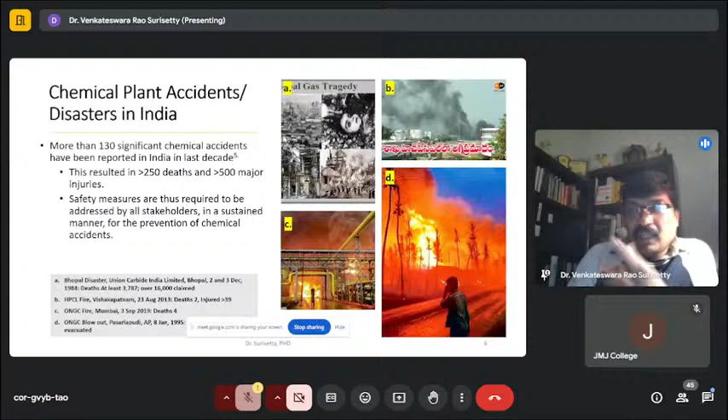So what we believe is these incidents can be easily prevented. But why can't this be prevented? Because of lack of knowledge or lack of concern. So these are major incidents that happened over the last decade, and some happened very recently - August 21st, unfortunately that is my birthday. On that day, I had just come back from India, I left on August 19 and reached here on August 20.

I was with Central Minister Pemasani Chandrasekhar Garu during the flight from Vijayawada to New Delhi. I was sitting beside him, and we were discussing the safety incidents that happened in India. I was talking about the LG Polymers issue and some pharmaceutical incidents.

This happened prior to the Achutapuram incident, close to Anakapalli, Visakhapatnam. I was telling him why these accidents happen and what actions the government should take to prevent them. He said unfortunately the government doesn't have much focus on this, especially the AP government, and asked how to stop it. I said first we have to do an audit of each and every chemical, pharmaceutical, or process industry factory.

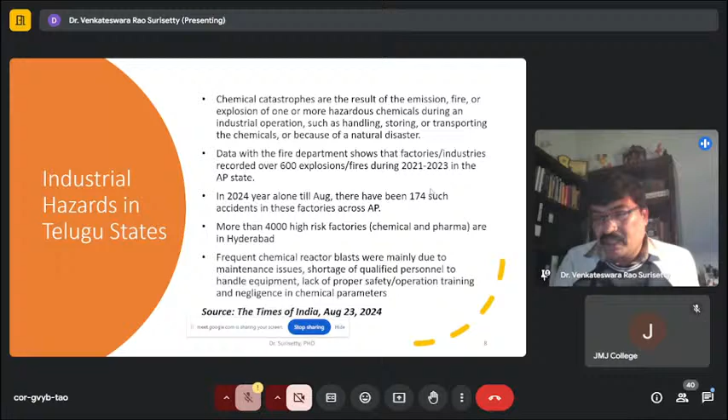Okay, so I took this LG Polymers incident as a case study, and I have done some root cause analysis on why this incident happened and what the chemistry behind it is. So I'm going to talk about this in the next few slides.

So what happened is on May 7, 2020 - you may remember this, COVID peak times, right? COVID happened and the central government in India locked down the country. They locked down the country during that time, and unfortunately this incident happened because the factory, the plant, didn't shut down properly.

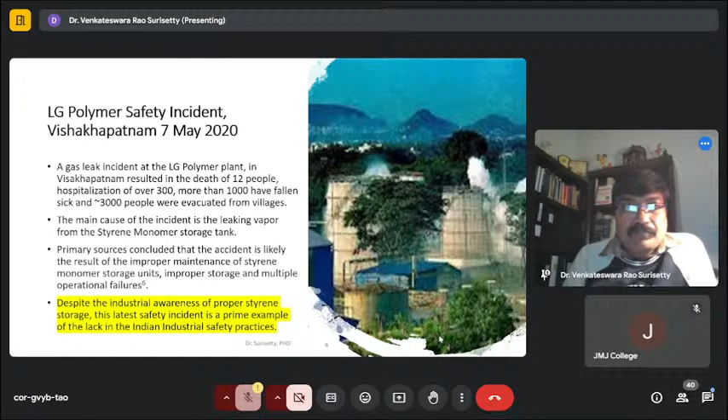Okay, so as a chemical engineer, with my education in Visakhapatnam, and being from India, I got a lot of safety awareness and was involved in safety design, plant building, etc. I thought this was something of great concern to me. I considered this as a case study, and I was reading all the newspapers, seeing the channels and websites, and I was thinking about what the possible system failures were that resulted in

this occurrence. After that I did some case study and tried to make some possible actions, and as I said, I communicated with some people in government, and I also handed this over to the committee which was reporting about this incident in AP. So I tried to do as best as I can from my side, being of Indian origin, with interest in Visakhapatnam, and being a chemical engineer.

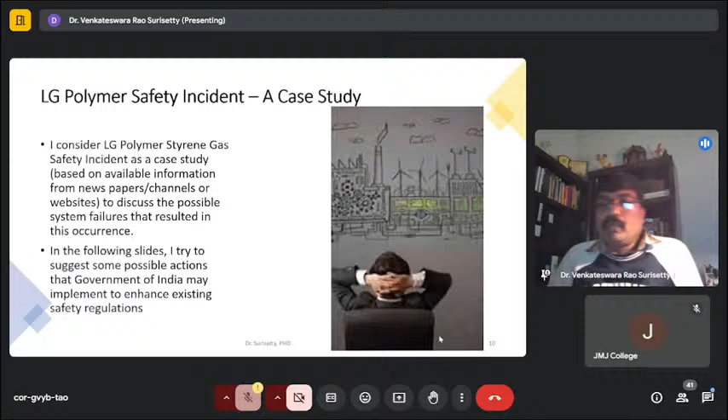Okay, so let's talk about styrene. Styrene is a C8H8 molecule, which is also a petrochemical, a hydrocarbon. It's a benzene group with ethylene on the benzene group. It has a molecular weight of 104 grams per mole. It's a colorless oily liquid with a sweet odor at room temperature, and it has a boiling point of around 145 degrees, which is higher than the boiling point of water, right? We know the boiling point of water is 100 degrees C.

But as I mentioned earlier about MTBE, MTBE is more dangerous than styrene. MTBE has a flash point where it can generate a sufficient amount of vapor to ignite in air even at 0 degrees. But styrene has a flash point of 31 degrees C. And in Visakhapatnam, do you know what the temperature is in the May summer peak season? It is around 45 to 50 degrees C. Let's say greater than 40 degrees C.

That means if you don't circulate a cooling coil around the storage tank, the room temperature itself is sufficient to generate an adequate amount of vapor and cause an explosion. So that's exactly what happened. If you see NFPA standards, NFPA stands for National Fire Protection Association. Using NFPA 30 standards, it can be handled while transferring, and for electrics, I talked about electric classifications in industry, right?

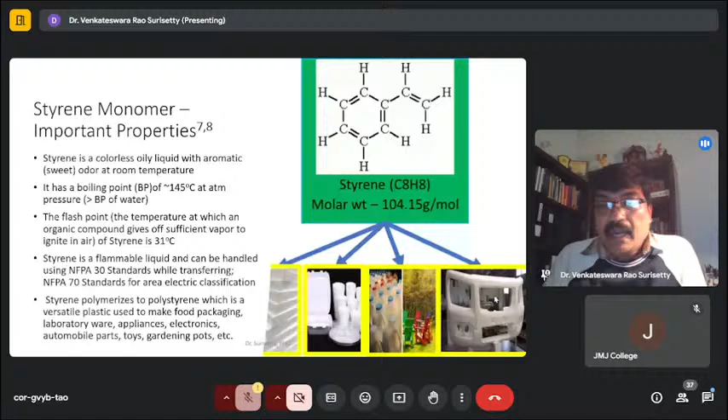So LG Polymers, they are making this chemical polystyrene, and they are marketing and earning a lot of money on this. They are marketing across the world and they are making a lot of money on this, but unfortunately they are not taking adequate precaution while handling this chemical. So you can see the pictures. The pictures from when the incident happened in Visakhapatnam, right side. You can see those pictures in the slides.

Okay. And what are the hazards? How is styrene a hazard to environment, health and safety, right? EHS stands for environment, health and safety. So if you see the fire and explosion hazard, this is classified as class 1C flammable chemical.

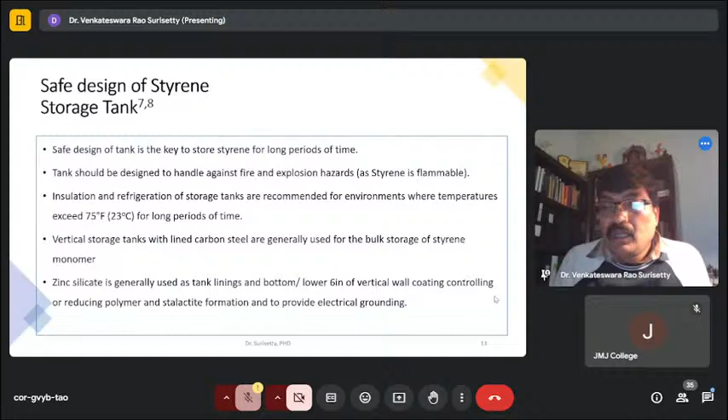Okay. And one other important thing is, whenever there is safety involved, we use high level alarms. This is a flammable chemical, so it is mandatory to use high level alarms for this tank. What these alarms will do: if the temperature goes beyond 23 or 24 degrees, it will alarm. If there is some vapor pressure generated, you can monitor the pressure inside the tank, and it has to give a certain alarm. If your cooling coil circulation has stopped, it has to give a certain alarm. So all these alarms have to be provided on the storage tank.

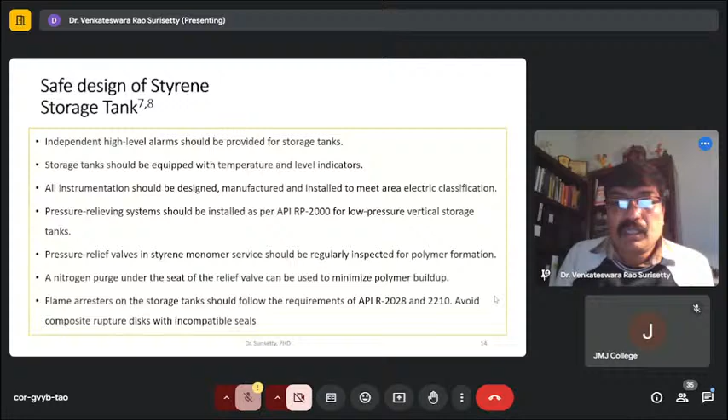Okay, and the storage tank should be equipped with all these things. Flame arresters. You have to use a nitrogen purge, which is very, very important. Nitrogen purge because the styrene will react with oxygen to make an explosion. So you should ensure that your tank does not have any oxygen stored inside. And you have to develop a pressure relief valve, etc. So all these things should be there in the storage tank.

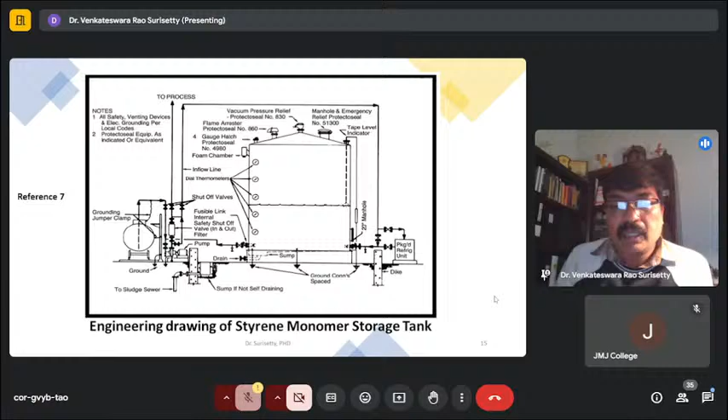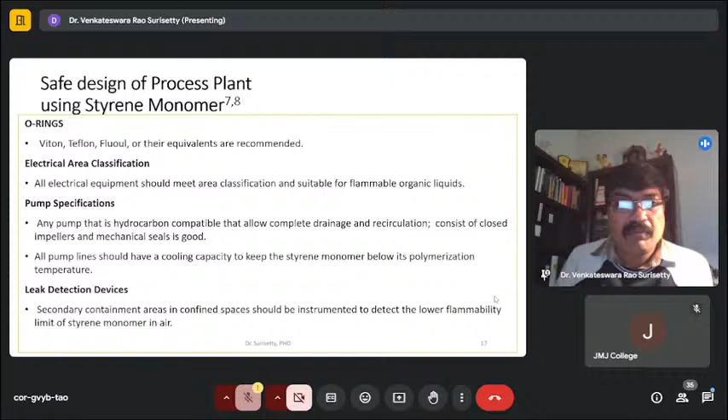So you can see the picture is also available, the engineering drawing for the styrene storage tank. So everything is there: how to use piping and hoses, what kind of O-rings you have to use, what kind of electrical classification, what the pump specifications are, how to use leak detection devices, everything is there. You have to use secondary containment, everything is there. But why did this incident happen, right?

And what exactly happened, I was very surprised after doing this case study. What happened is when the central government issued the lockdown of the country, they just closed the plant, shut down the plant, like we shut down a water tank.

We have a water tank at home, right? We pump the water to the tank. When it starts filling or comes to the level, we just switch off the pump, the electric connection, or switch off the motor and stop the water pipe. So they did exactly the same with the styrene storage tank.

So what happened is they didn't purge the tank with nitrogen. They didn't ensure that they purged the tank with nitrogen, and they have to add certain polymerization inhibitors to prevent this polymerization. Because styrene polymerizes at normal ambient temperature, and this polymerization reaction is exothermic. It evolves heat, and this polymerization happens because of the presence of oxygen.

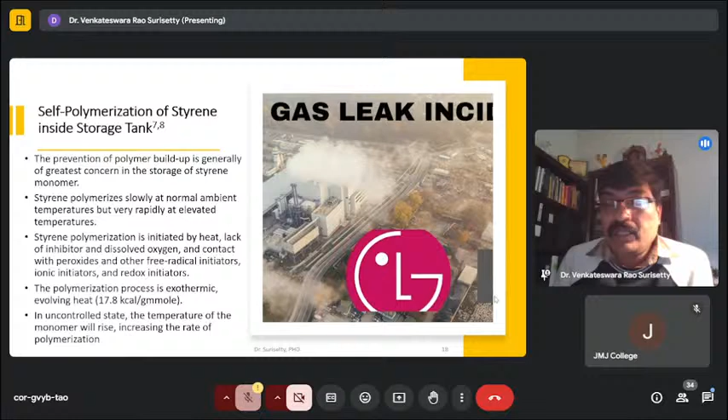So when they shut down the plant, they didn't ensure that there were inhibitors inside the tank. They didn't ensure that there was no dissolved oxygen, so they didn't purge with nitrogen. They didn't check whether certain peroxides were already generated, or free radicals or ionic initiators, etc. So they left the tank in a very uncontrolled state, and it was already May, so the temperature was like 40 degrees.

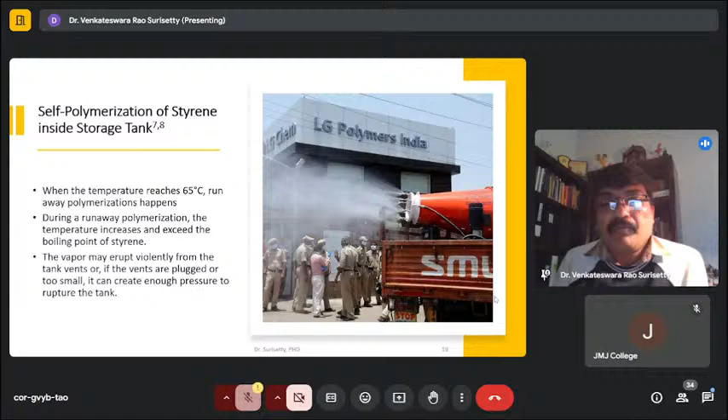As I said, for any fire triangle there should be a fuel, availability of oxygen, and an ignition source. The ignition source is the exothermic activity, it generates heat, there is air as oxygen, and the styrene itself is the fuel. So initially auto-polymerization happens, the temperature rises from say 30 degrees to 65, and then there is runaway polymerization, a huge amount of vapor violently erupts from the tank, pressure develops, and it acts like a bomb.

And because you guys are chemistry people, I will talk a little bit more about the chemistry aspects here. I'm talking about inhibitors, right? What these inhibitors do. For example, for styrene, they have to add 4-tert-butyl catechol as an inhibitor to stop the autopolymerization of the styrene molecule. This is customarily added to liquid styrene at a concentration of 186 grams per liter of styrene as an inhibitor to stop polymer formation.

And as I said, oxygen concentration is the key. You should not allow oxygen to dissolve in the tank. But oxygen will dissolve automatically, right? So what we generally do for these kinds of flammable liquids is purge the liquid with nitrogen. So when there is no personnel involved and no nitrogen purge because of the lockdown of the country, and they leave the tank as it is, then an excessive amount of oxygen is present in the tank, and there is no nitrogen blanket.

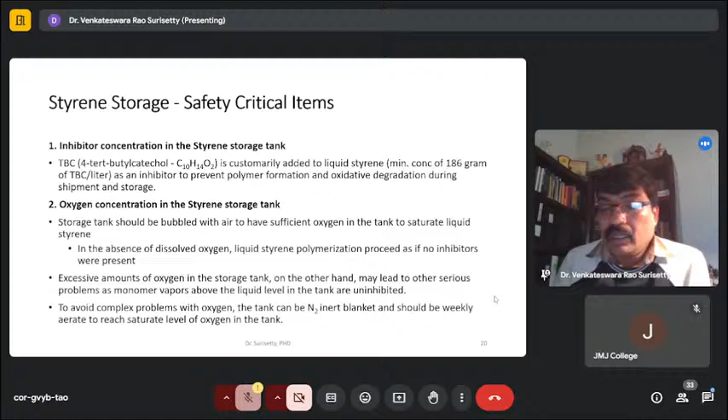Then dissolved oxygen is generated inside the tank. So you have to do proper sampling to ensure the TBC levels and the dissolved oxygen. But there was no personnel available at the time as the country was locked down. Very unfortunate. And one other thing is they have to circulate the cooling coils because they need to keep the tank under 20 or 23 degrees. So there was no cooling. And apart from that, no alarms, no interlocks, no shutdown procedures, no people available.

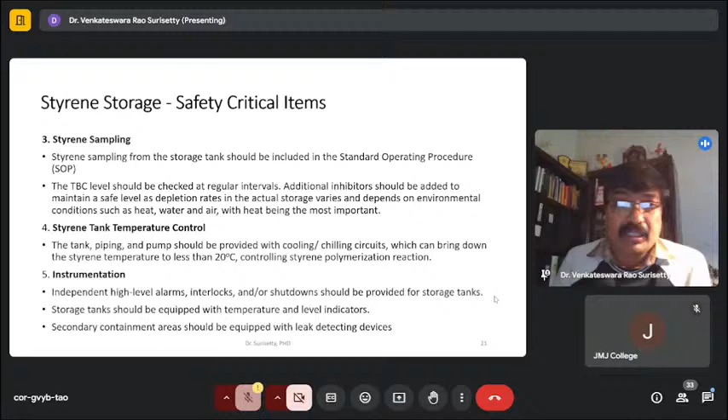The temperature and level indicators are not giving proper alarms. Secondary containment system, I don't know about this. There may not be any leak detecting devices, etc. So all these things happen. Then I start making this root cause analysis.

Okay. So when we say root cause analysis, we will ask questions, right? I will ask questions myself. Why, etc. So we call it 5 whys. And within 5 whys, you have to solve. We have to get some answer, and we will try to get some answer.

So what happens is styrene gas leak at the LG Polymers chemical plant site, which has taken some 12 lives and damaged some people and the environment, etc. And why has it happened? Because the temperature and pressure rise could cause styrene to evaporate through the vent, due to an uncontrolled system.

Why did this happen? There are 2 causes, right? At LG Polymers plant, one is the technical aspect, and one is a general aspect. Okay, let's go to the technical aspect first. Why did this styrene evaporate to the environment? Because the ambient temperature rises.

The ambient temperature in Vizag is greater than 40 degrees because of summer, and hazard conditions such as failure of the tank refrigeration unit. There is no cooling coil, there are no inhibitors inside the tank, there is no nitrogen purge, and there is dissolved oxygen inside, and that's how it evaporated, right?

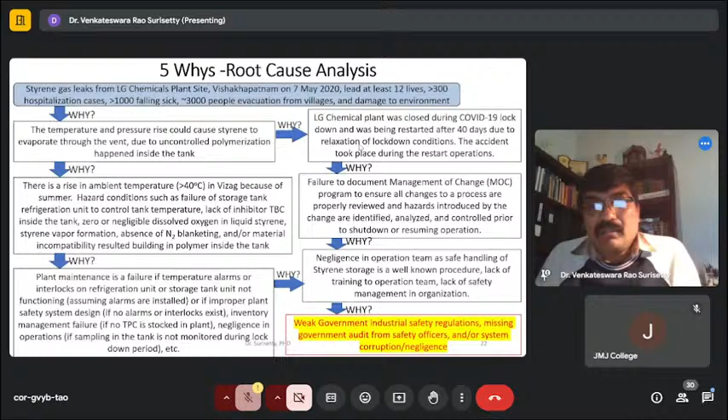So this kind of attitude. Okay. And when you see this, why do these Indian industrial disasters happen, and why are we more vulnerable to these kinds of disasters?

I did some research again, and I also have my own team in India, right? I am running a plant in India also. So many plants, even in Gujarat and North India, are using aging process plants. That means they are using old process plants. They don't design properly, or they don't use the safety measures.

They don't train their people properly, and they use organic solvents which can cause explosions, and they don't take proper safety aspects in their design or in handling those chemicals, and even safety operating procedures. They don't train the humans properly. Lack of emergency response team, or lack of proper operational knowledge in the people operating these.

And then, even when they dispose the waste, this waste cannot be disposed directly. So if you see many pharma companies or many chemical factories in AP, they are just sending these waste water lines or air to the environment, water bodies and the atmosphere, right? They cannot do that, and government should not allow that.

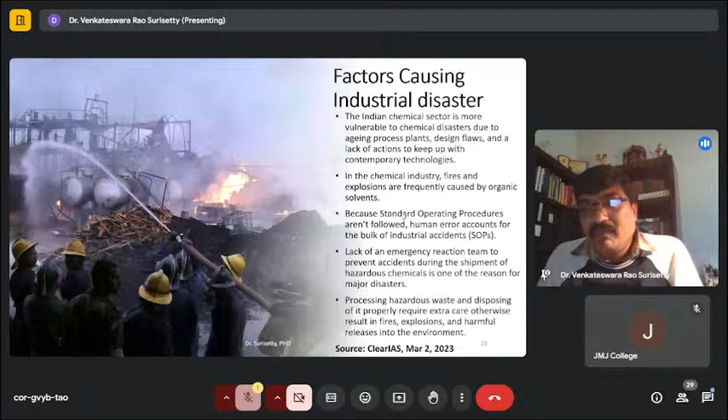And this information I got from an IAS academy, Clear IAS. They train these collectors and all. So this information I got from Clear IAS Academy, which is cool. I thought, yeah, this is very good. These collectors, the IAS or IPS people, have to get this industrial knowledge, and they are doing very good in this. But implementation, I think, is very poor.

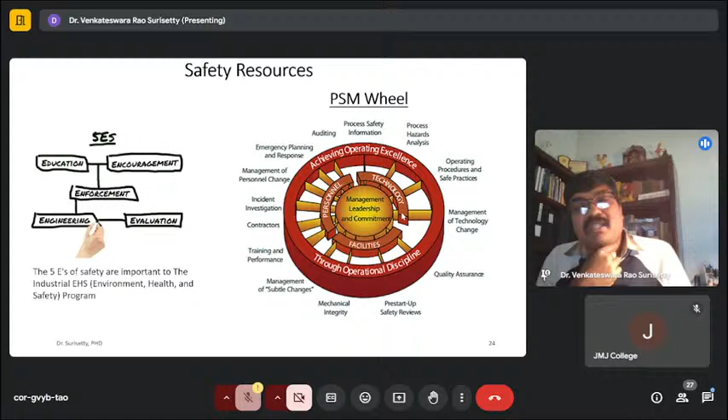And what are the safety resources? There are several safety resources. It's not like these are not available. Every plant, every industry, every government knows about these safety resources. Education, we call the 5 E's: education, encouragement, enforcement, engineering, evaluation. They have these resources. We call it a PSM wheel. What is PSM? Process Safety Management.

So this wheel has several spokes, like process safety information, hazard analysis, operating procedures, safe practices, management of change, MOC, as I said. All these resources are available to every industrialist, every employee in the industry. And if you go to the industry, these are all stuck to the walls of every Indian industry. But unfortunately, whether they are following those rules or not, I don't know.

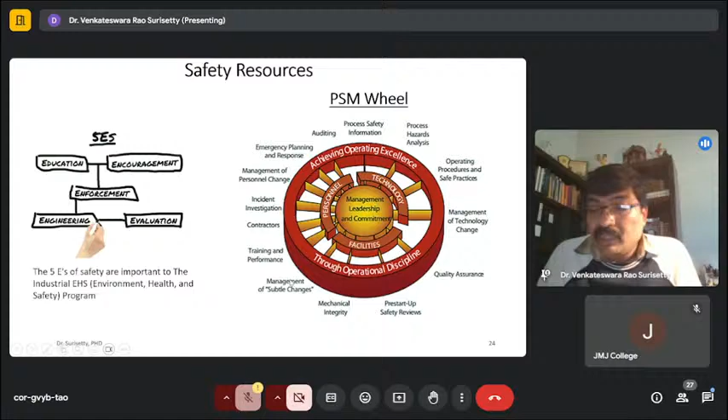So I talked about the subtle change, right? Management of subtle change. This was the failure that happened in the LG Polymers case. So what do we have to do? What action plan does the government or the industrial people have to follow? They have to train. Industrial safety awareness needs to be improved in India to compete with Europe and North America. Not only production, safety awareness has to be in competition with the Western nations. And as I said, zero tolerance should be our target.

What it means is we should not allow even a small chemical leak to the environment, not just explosions. And as I said, these explosions can be easily prevented by proper design and safety systems, including rupture disks, material compatibility, mechanical integrity, performing process hazard analysis. These are all PSM. These are my daily duties as a senior technical person in industry right now.

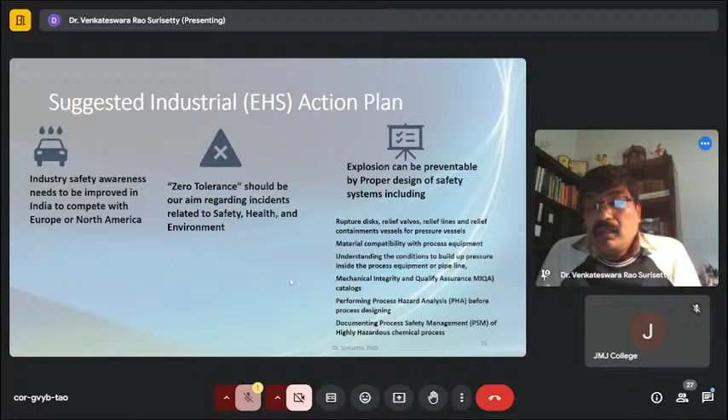And I assume the same thing happens with employees in India also. But why so many explosions happen, I don't know. Maybe because of negligence, a corrupt system, bypassing the laws, etc. So I see Indian industrial safety rules and regulations are fine, but are they compatible with the Occupational Safety and Health Administration, which is called OSHA? OSHA is the US safety regulation.

Whether they compete with OSHA, or if not, then they can implement some addendums or bring new regulations to industrial safety. And first of all, I don't know whether these government safety officers have proper training, and if not, then they have to get trained accordingly.

Canadian industrial safety rules are very stringent, especially Ontario's safety rules. We call it TSSA, Technical Standards and Safety Authority. So government safety officers in India have to get trained according to at least these TSSA rules. Okay, so these are some of the action plans I came up with.

But I talked with many government officials, including the last government. I was very close to Botcha Satyanarayana Garu. I talked with him about this. I talked with Central Minister Pemmasani about this. I talked with some other ministers, Ravela Kishore Babu, I think, some other time. Many people in government, politicians.

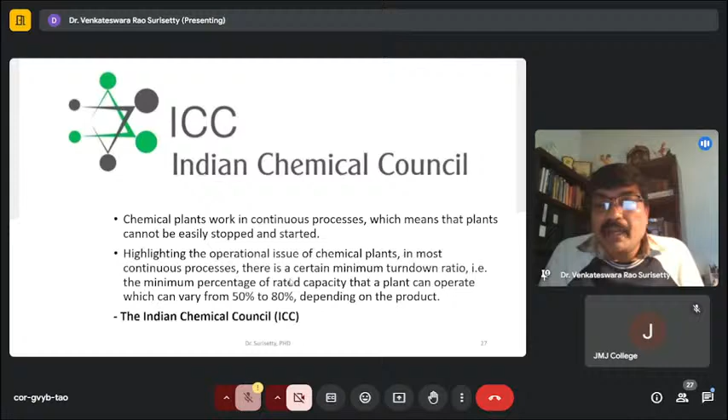There is a minimum turn down ratio. You have to allow some time for maintenance. I don't know how Indian industrialists think, but if they don't want to spend money on maintenance, then these kinds of incidents will happen.